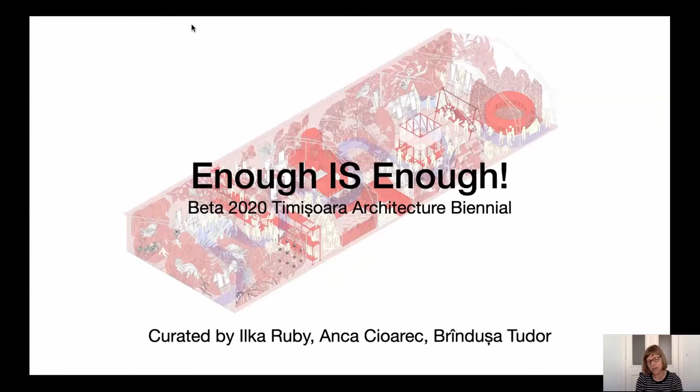And we structured the exhibition by 9 claims we made that we think are crucial for responsible architecture. And in this lecture, I will show one example per claim. So let's start with the first. Do we really have to build? Roughly 1 million animal and plant species are approaching extinction. This is more than ever before in human history. And the #1 driver of change is shifts in land use and sea use.

Urban areas have more than doubled since 1992, and 25 million kilometers of new paved roads are likely to be built by 2050. That means the work of planners, architects, and engineers will have a massive impact on that development and its effect on our planet. So every project should start with the question, do we really have to build? And no should always be considered an acceptable answer. And the project I want to show is by Lacaton & Vassal, a place in Bordeaux. The architects were asked to make a proposal for a competition to embellish this plaza, just to make it nicer.

And they participated in this competition, and they went there and spoke to people, spent some time there. And their conclusion was the place is already beautiful. It doesn't need anything more. Then nothing has to be built there. The only thing that could be changed is a bit of maintenance.

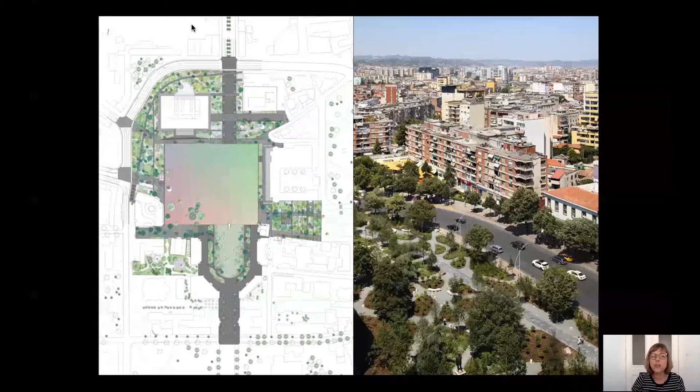So when you see here in the plan, there is a green belt that surrounds the plaza, and this green belt creates some kind of filter between this dense and chaotic city and this really huge open plaza in the middle, which is here marked as this square. And this green belt consists of a huge variety of plants that are from Albania or used to be from Albania, but many of them don't exist in Albania anymore and had to be re-imported.

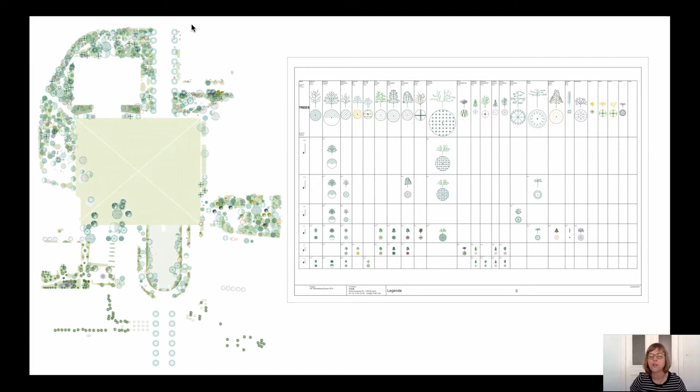And then they worked together with local communities and adjacent users of the buildings to create a kind of programming of these different gardens they created, so that the functions of the buildings can also spill out into this green belt, into the plaza. So you have a lot of different atmospheres in these gardens surrounding this big plaza.

And what it also did was, of course, that these plants and gardens combined these buildings that were scattered around the plaza, most of them from the communist era, very monumental buildings. You see also these water puddles on the plaza. So there's an underground system of fountains.

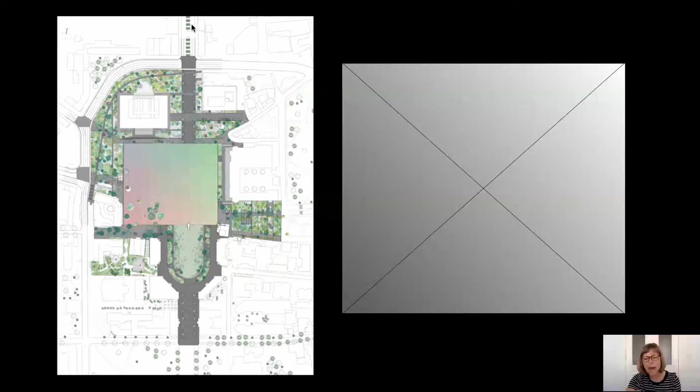And once you're on this tip of the pyramid, you're more or less on eye level with these huge buildings surrounding the plaza. All these buildings were built on monumental pedestals. So when you're standing in front of them, you look very small, and they look very monumental. And by providing this very shallow pyramid, you will be able to see these buildings on eye level.

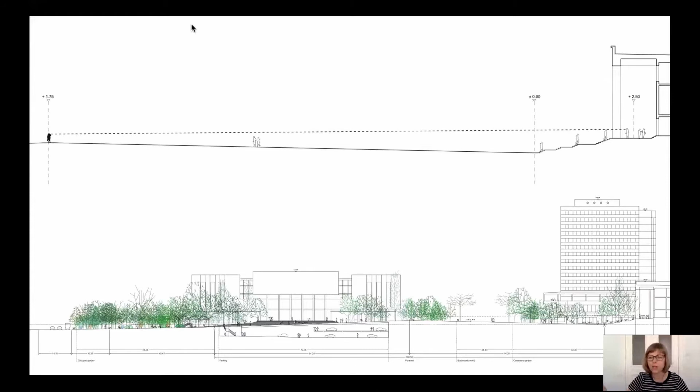And the lower section shows the whole plaza. You see, there's also an underground parking included. These are these underground fountains, and these fountains make these very nice patterns on the plaza. You see the colors of these stones, but it also, of course, creates some kind of microclimate. It's a very hot place, so it cools the place, and of course, it's also fun for kids to play with the water.

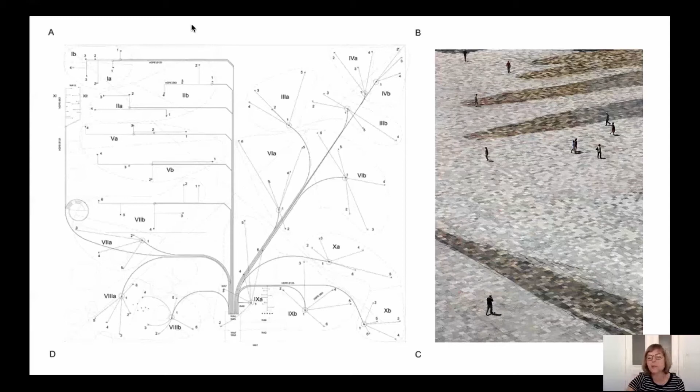When you look at the ground and the stones, this is also very interesting, because these are different stones from all over Albania, and they were used here on that plaza.

So the architect made a process where they were looking at what kind of local stones are available in the country, what are the properties, what are the colors, and so they brought together all those stones with these very different structures and colors, and they created this pattern, these shading patterns.

So when you see to the right the pyramid, you see that from the left bottom corner it's more the reddish colors, and opposite, the right upper corner, it's more the greenish colors. So you have this very, very subtle shading in the end. Yeah, and this makes this really amazing plaza. Of course, there's much more to tell about this project, but I will only focus on the aspects related to the claims we made.

Reusing what is abandoned is the next claim we made. The decline of industry has resulted in a vast abandoned built heritage. And although these buildings were constructed for very different purposes, they are often surprisingly flexible and can be adapted to contemporary needs. Protecting these structures and inventing new ways of inhabiting them is an important part of architecture today. And demolishing these buildings should be our last option.

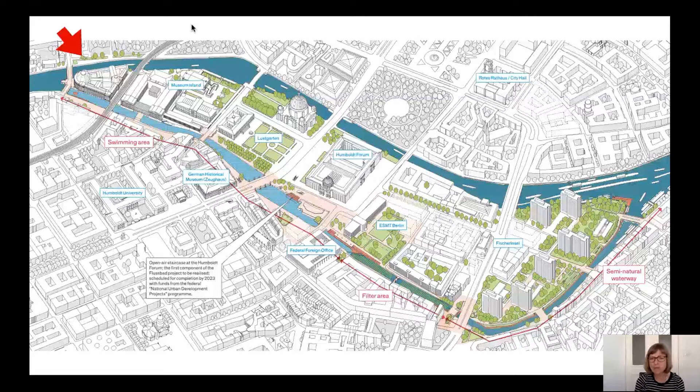Which is totally public, without any entrance fee, without any lifeguard, and it gives access to the river before it combines again with the other arm of the river, close to where the arrow is. So I will lead you through all these 3 parts. This would be the semi-natural part. Before, this was just a kind of stone canal. I mean, it still is a stone canal because the project is not yet implemented.

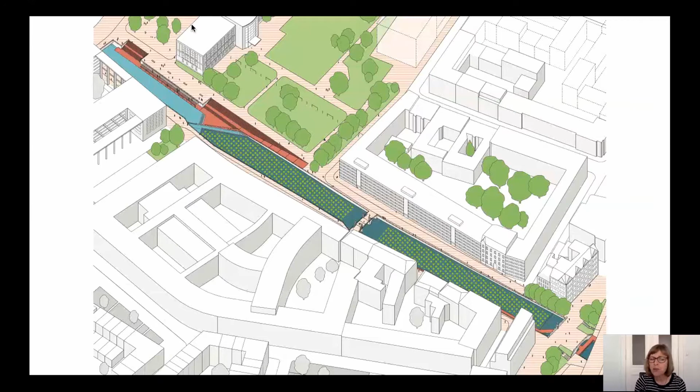But this first part would be kind of a natural environment where you have the possibility to go down to the water, and you have this kind of adjacent park to it, and this walkway. This is the section for it. And then if you go further, you come to this kind of filter area. This would look like this. So it's really reed and sand and gravel, and the water, by flowing through this, gets clean.

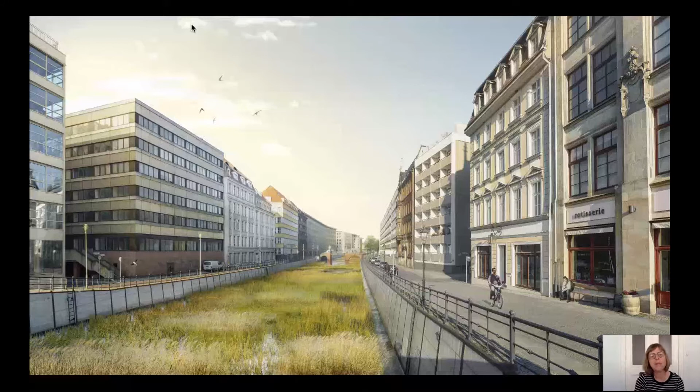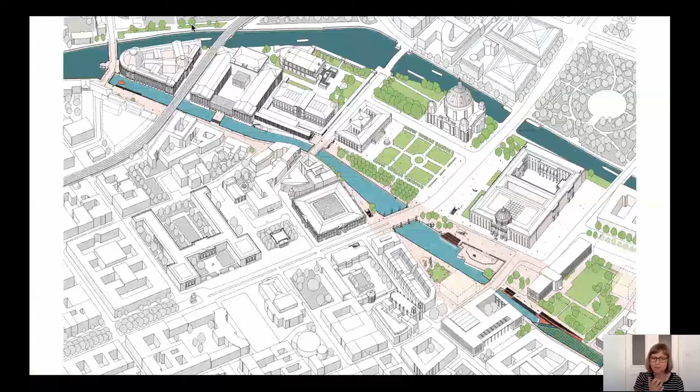And it flows into this bathing area, the pool, and there are just minor adjustments with stairs that make it possible to go down to the water, with some kind of changing rooms where you can change and store your stuff. That would be the last part of the swimming pool. That looks like this. So you could experience this kind of new historic city center from the water.

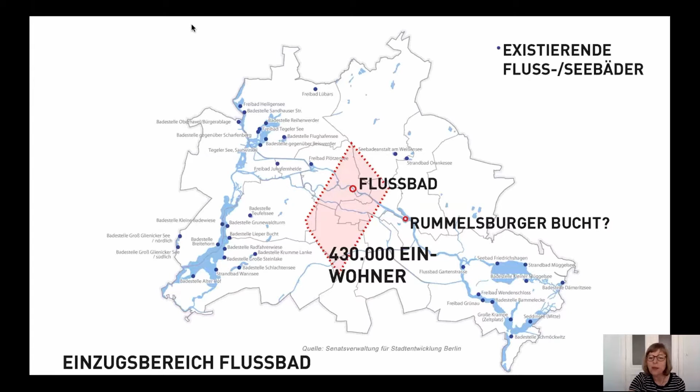Next claim is repairing what is broken. The most sustainable building is the one that never gets demolished, since its materials never turn into waste and no additional emissions will be produced in erecting a replacement. So we must invest time and resources in repairs so that every structure can reach its maximum lifespan and new ones don't need to be built. Maintenance is a craft in itself and must be considered an integral part of the design process, which can generate important features of the architecture.

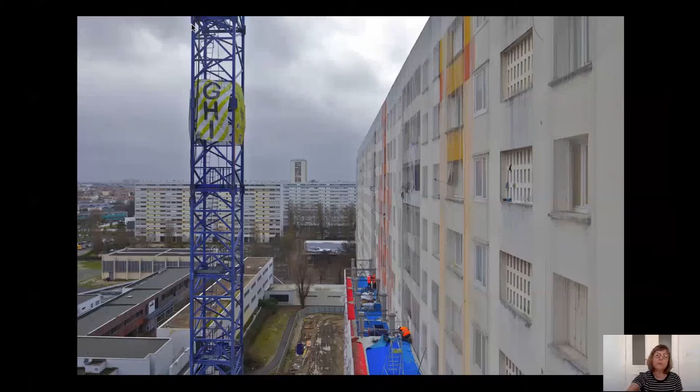So what was done? It was transformed by taking away parts of the existing facade and replacing it with a winter garden and balcony. You see here on the lower part, there are already these platforms for the winter gardens. This was built first, and it would also already work as the scaffolding for transforming the building. Once this was built, the facade was taken away, and after the transformation, it would look like this. So you have a huge winter garden.

The existing facade is replaced by these large floor-to-ceiling glass sliding doors, and you have this winter garden, and on the left you see the sliding doors of the winter garden, which are of this thin corrugated polycarbonate material, and the balcony in front of it.

And by adding these silverish curtains you see in the back, you can also protect from too much sun, and there are also curtains inside the existing building, behind the glass facade to the right, which help to insulate the building. These are thick thermal curtains.

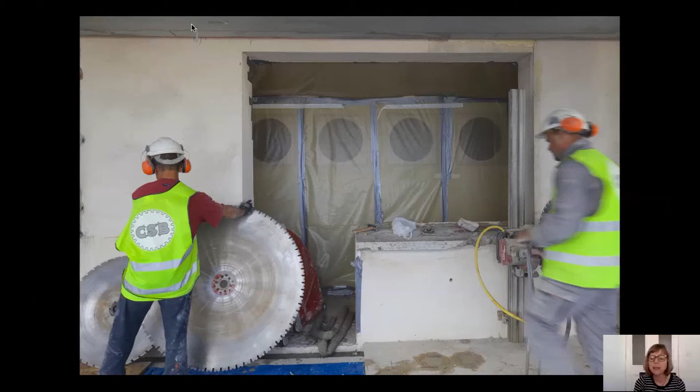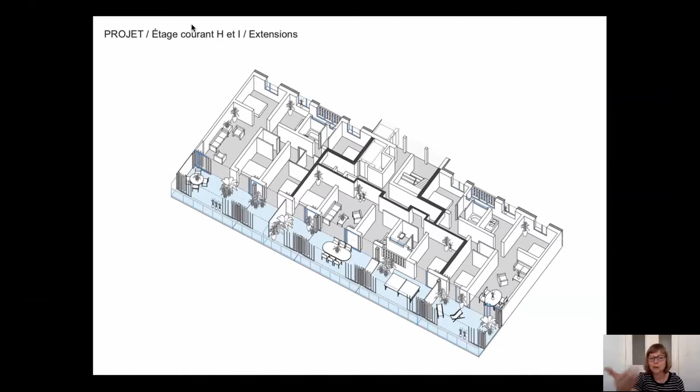So something that looked like this before got kind of cut out. You see this temporary wall behind the opening to prevent dust going into the apartment, because as I said before, the apartment is still occupied. And then after the transformation, you have a space like this. Here you see the ground plan, and all the blue part is the newly added part of the winter garden

and the balcony. So this winter garden is not only an extra space the inhabitants can use, and by this enlarge their apartment. It also works as a thermal buffer, because this is not heated. It's a not heated space, but of course it gains passive solar gains, and by this it's a buffer, and it reduces the heating costs for the apartments.

Recovering materials would be the next claim. Usually you shouldn't demolish buildings, as we saw before with Lacaton & Vassal, but when it comes time to demolish a building, nevertheless, we must learn to use its leftovers. Building elements can be stored, protected, repaired, and finally put back on the market. By reusing materials and components we already have, we can save resources and reduce waste.

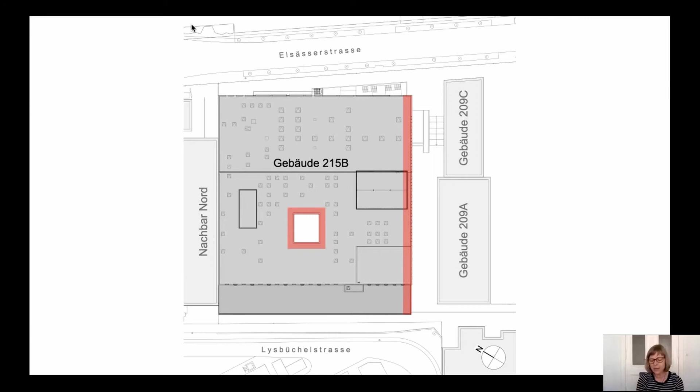So when we see the ground plan, it was a very deep building because the distribution center didn't need light. But now, of course, it needs light. And so they had to cut this courtyard into the building. And also on the right, they had to shorten the building because the building regulations asked for this kind of passageway on the right. So this is the passageway that had to be there. And you see, by doing these two interventions, the courtyard and the passageway, there was a new facade necessary.

86 meters long and 10 meters high. And these two facades, to the new courtyard and to the passageway, of course needed windows. So the architects collected 200 windows, and they did this by asking window producers in a radius of about 100 kilometers if they had surplus production. That means windows that were produced too much, or not according to the order. And usually these windows are thrown away, but by this they could be saved and used for this building.

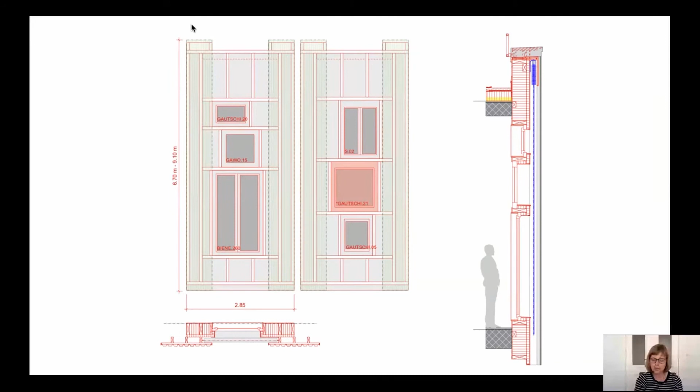Of course, these were the forms and sizes of these elements. So you had various window shapes and sizes, and they all had to be combined in a design that could take in these very different shapes and sizes. So these are wooden facade elements where these different windows can be integrated, and to make this very wild window arrangement a little bit calmer, you have these green metal sheets to the left and the right. These metal sheets, I'll come to later.

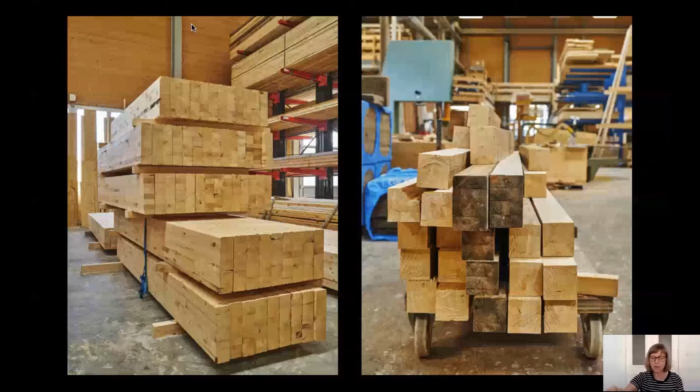First, you saw these frames are made out of wood, and this wood is also recycled. The facade elements are constructed from 150 cubic meters of reused wood. The architects collected roof purlins that are usually burned after demolition of a building. And this wood was upgraded to glue laminated beams that meet the strict technical requirements for facades. So that was an upgrade of this kind of used material.

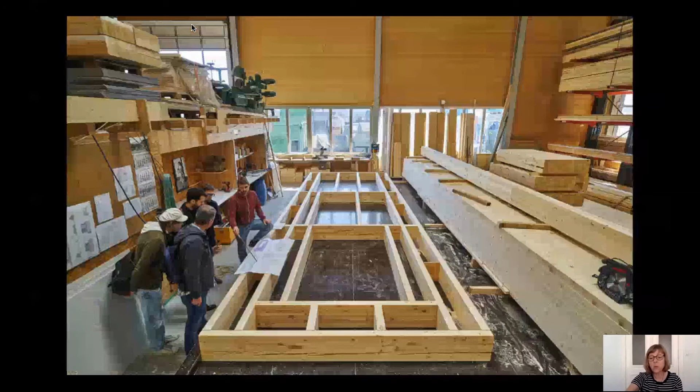And out of these beams, they built these elements, facade elements. And these elements were then filled with the windows, but also with insulation material. And these insulation materials are also leftover pieces of rock wool insulation that were collected from other construction sites.

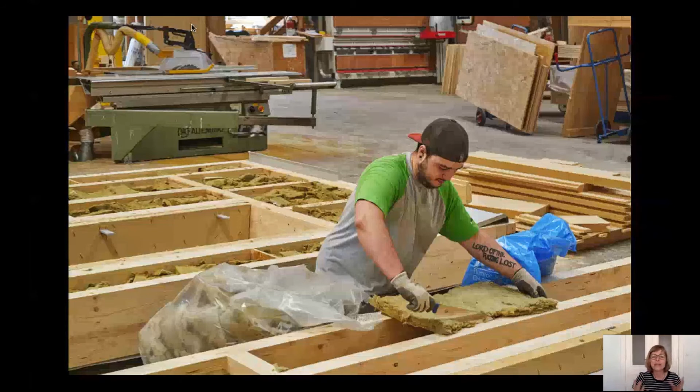So usually these kinds of leftovers are melted down again with a lot of energy and processed into a new product. But here these pieces were collected and inserted in this wooden frame, and whatever was necessary to fill up was filled up with stone wool granulate. So this was all prefabricated in the workshop, as you can see here, and then brought to the construction site and assembled as the new facade.

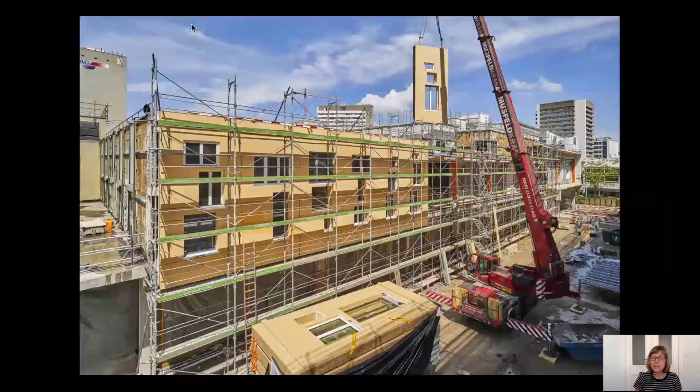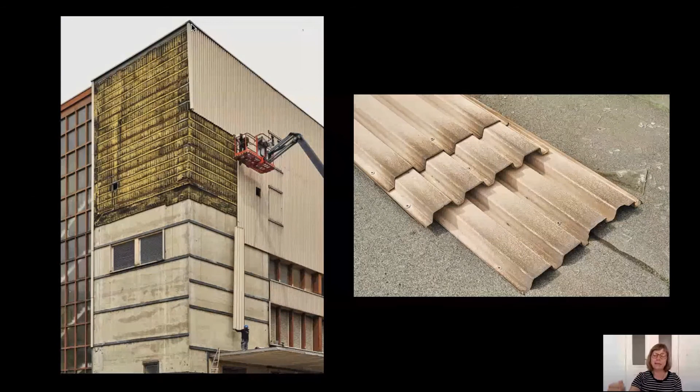Now we come to this green metal cladding that was used in the existing building before, and it was reused directly. And in addition to this, there was also sheet metal cladding from another building only 50 meters away that wasn't used anymore. So they dismantled also this material and reused it in this building here.

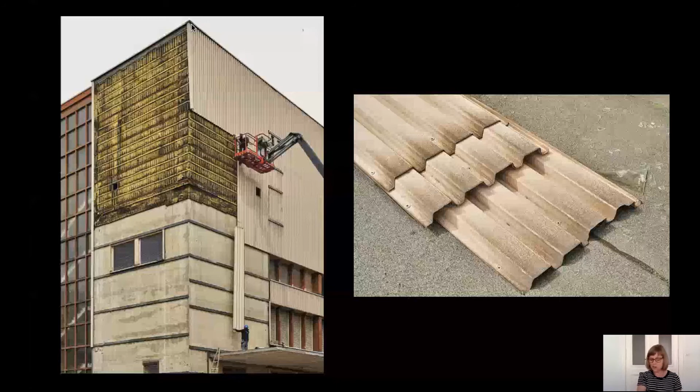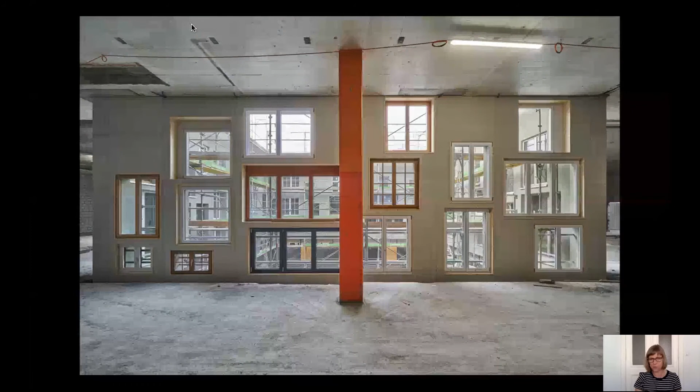To change from a linear to a circular economy, the availability of used building materials and components needs to be improved. Used materials should be as easy to acquire as new materials. This is of course not yet the case, but there are more and more people that deal with it, and I think this is something that really should be supported.

Remembering crafts was our sixth claim. To reduce waste and emissions, we must rethink not only what we build, but also how we build. And in an increasingly digitized world, we must value the social importance of labor and manual fabrication. Looking beyond the boundaries of building as usual can reveal alternative construction techniques, materials, and typologies.

And sometimes a look back into the rich history of techniques that have either been forgotten or deliberately suppressed in the name of progress can offer smart solutions. By rediscovering, learning from, and adapting methods that evolved over centuries, we can make smart use of local resources, both materials and human know-how. This project by Anna Heringer, the Anandaloy building, is a very good example of that.

It's in Bangladesh, and it's a center for the treatment of people with disabilities and a workshop. And often people with disabilities are seen as a kind of punishment from God or bad karma for their life. And because of this, they are rather hidden than included. And places for therapy are very rare in the country and often not existing at all in rural areas such as this here. And in the beginning, the building was only planned as a therapy center.

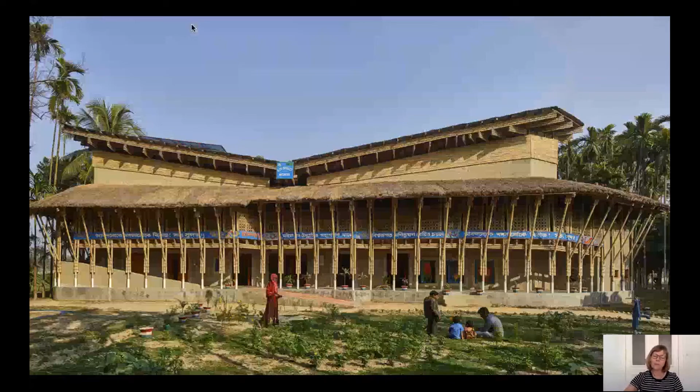But then Anna Heringer and her team were able to expand the program of the building and include another story, hosting a workshop for the female tailors in the village. And the concept was not only to provide treatment for the people with disabilities, but also provide them with an opportunity to learn and work and engage in the community. So you see, the building has this huge ramp so that also people with disabilities are able to enter the first floor.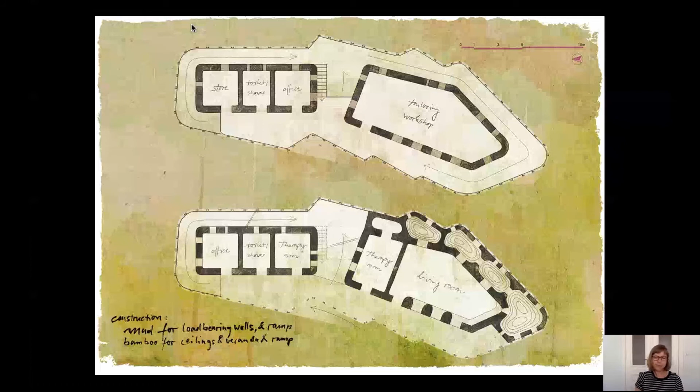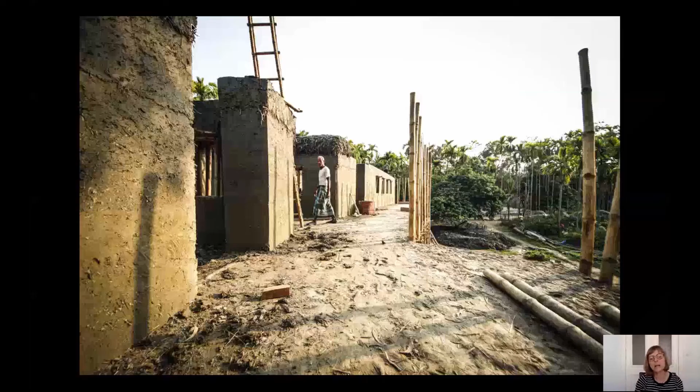It was developed together with a local team and built with the local team. And you see here, it was built out of local materials, adobe and mud and bamboo. And both materials leave no waste if the building at some point gets demolished. So the bamboo can degrade, and the mud just disappears, of course. You see here how the building is being built. So the walls are out of mud, and the roofs are made from bamboo.

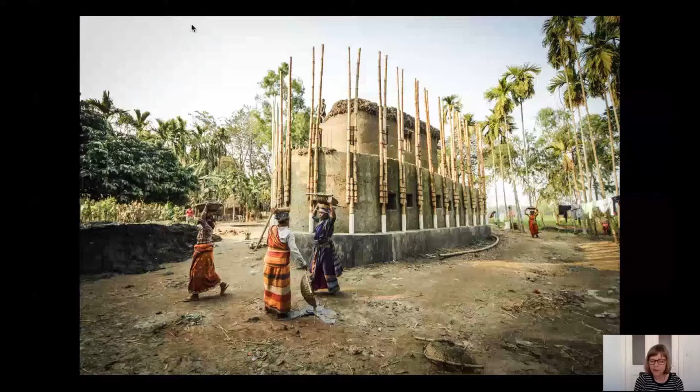You see the therapy and learning spaces on the ground floor. The therapy spaces here. You might have seen on the ground floor these cave-like spaces where kids can hang out and hide and play.

And you see the first floor with the access to the workshop where the women can work with the textiles, producing first of all clothing, but also very beautiful things like this stitched ground plan for an exhibition, for example.

So we have seen mud and bamboo before, two very old building materials, but we also must research new alternatives that follow a cradle-to-cradle design approach and products that are biodegradable or loop back into the cycles of production. Construction components can become packaging or agricultural nutrients, and industrial or agricultural byproducts can become building materials. And already known renewable materials such as wood, bamboo, and hemp can be exploited even further.

To achieve this, architects must collaborate with biologists, ecologists, and chemists to cultivate new biomaterials made from fungi or bacteria. And I'll show you two examples of that from Dirk Hebel and the KIT Karlsruhe. So one deals with bamboo. We have seen bamboo before with Anna Heringer, and there the bamboo was used as it is, the trunks of the bamboo. But this can also be developed further.

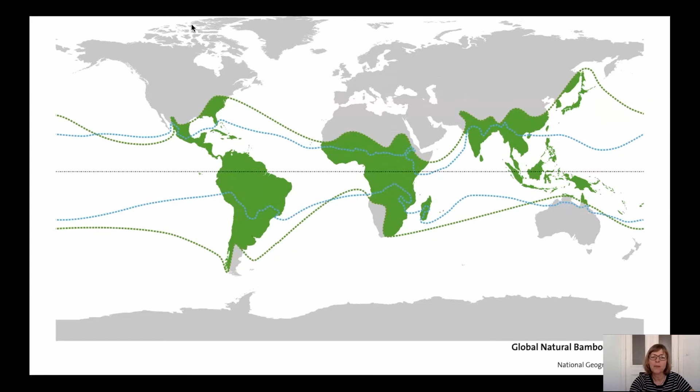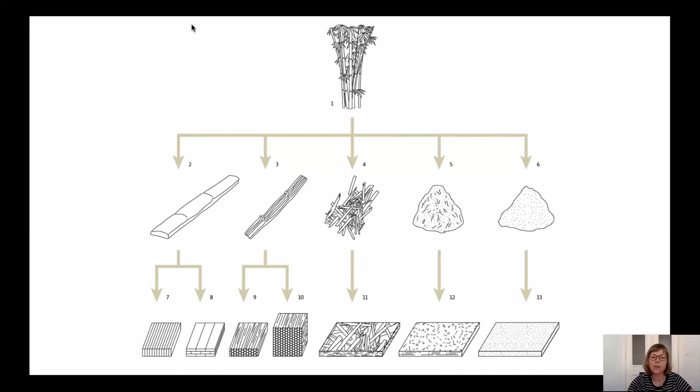So instead of using, let's say, the trunks of the bamboo, you can, of course, develop it further. You can cut it and make panels and other elements out of it, so that you can use it in other ways than we've seen before. And a lot of new applications are possible. These are two of the products that are developed. Bamboo is also really a strong material. We see here when you compare it to steel, it's even stronger than steel.

And if you think that steel reinforced concrete is the most common building material in the world, and that developing countries use close to 90% of the cement and 80% of the steel consumed by the global construction sector, but very few of these countries have the ability or resources to produce their own steel, bamboo could be a very interesting replacement for them, because then they could produce this by themselves and they are not dependent on the developed world.

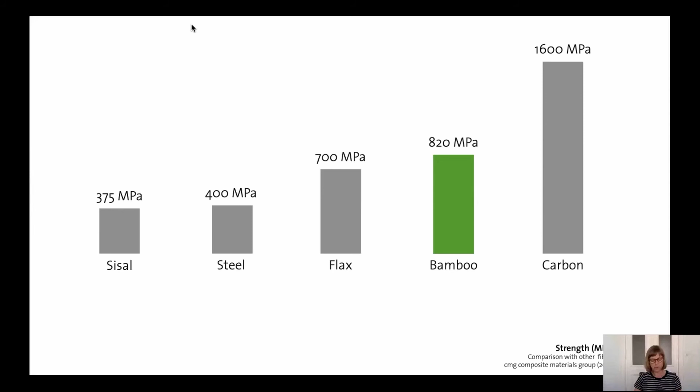So, for example, out of 54 African nations, only 2 are producing steel. So all the others have to compete for steel on the global marketplace. And this is why there is research going on into how, for example, bamboo could replace the reinforcement of concrete. And so this was the bamboo example.

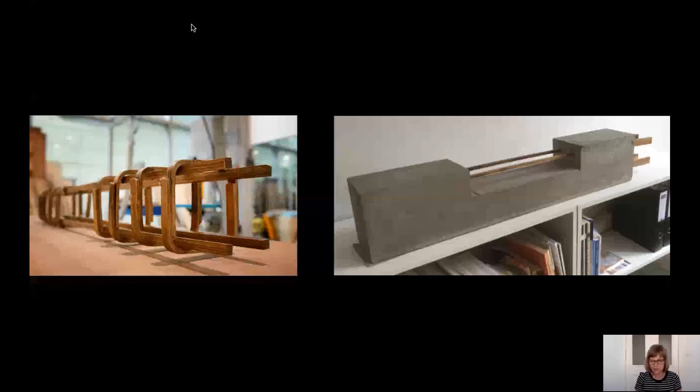And another example is mycelium. What is mycelium? Simplified, one can say it's the roots of the mushrooms. It's a kind of extensive underground root network and normally remains invisible. And it grows very extensively, densely and homogeneously, and it represents the digestive system of the organism. And this can be used to grow building elements.

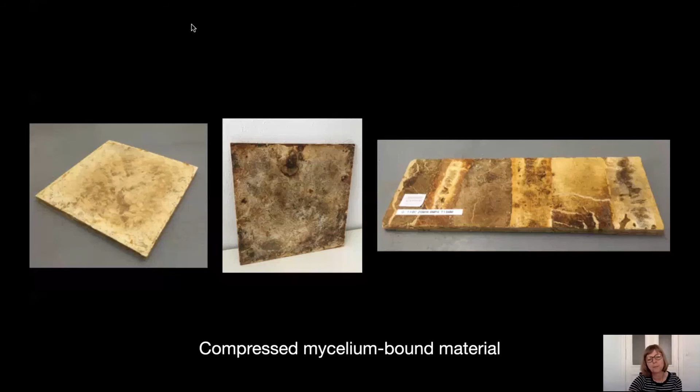In mycelium-bound building materials, the binding power that this root network provides us is used. Agricultural waste or waste from the wood and food industry can serve as food for the fungus for the growth process. And the mycelium network binds the organic substrate as it grows. This process can take place in specially made molds, so any geometry can be produced. And we see here some examples of compressed mycelium-bound materials. We have these panels or insulation material, as we see here in this wall.

And this material combines several properties. They have thermal and acoustic insulation, and mechanical strength comparable to that of polystyrene foams, up to plywood. And of course, it also uses low energy during production, and it's biodegradable. And here we see the MycoTree that was developed at the KIT. Here it's used as a structural element. The mycelium was grown in these different elements, and these elements are then connected, as we see here, into this kind of structure.

Caring for community would be the next claim. Because a responsible architecture takes into account not only the ecology, but also the economic and the social aspects of a project. And over the past decade, we have witnessed a growing social movement fostering collectivity, sharing, and participation. In the wake of the global real estate and financial crisis, a new generation started seeking alternative ways of life based on sharing, and the idea that you have to own something in order to use it became obsolete. So why buy a car if you can share one? Or why pay for a hotel if you can swap flats?

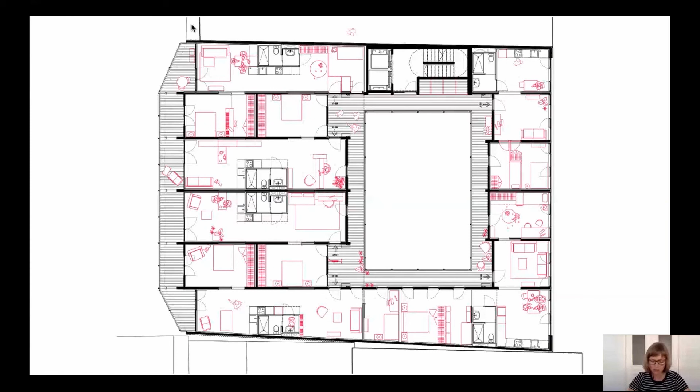So this is one of the standard ground plans of the building. It consists of 28 private apartments; they have 40, 60 or 75 square meters. But the project also consists of a lot of collective spaces. We see here the ground plan. To the left, there's a huge collective kitchen space and dining room. There are laundry rooms, a multi-purpose space, spaces for guests, healthcare spaces, storage spaces, and exterior and semi-exterior spaces such as the patio and the roof terrace.

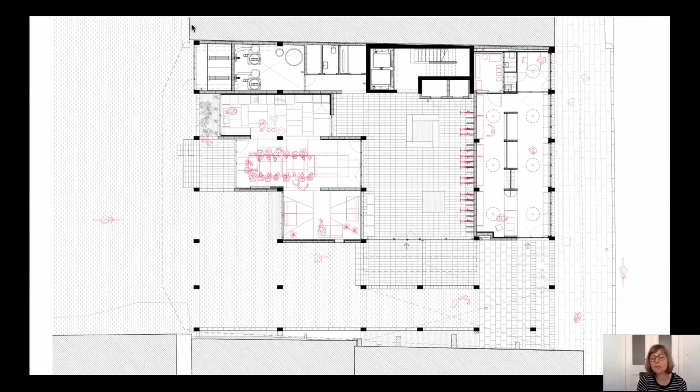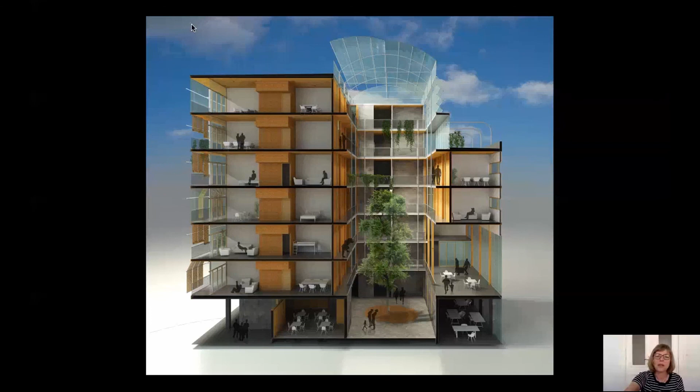So this is the collective kitchen. And we see the section of the building with the kind of patio. And there's this big double height space to the right on the first floor. This is also collective space. And we see also the roof terrace to the right. This is the collective space with the laundry, which is used for many purposes.

All the apartments have access from this kind of arcade surrounding the courtyard, which is also used as a balcony and makes a kind of transition space between the public and the private. You see here already a little bit of the covered roof, and this is the terrace. The roof can be opened and closed according to thermal needs. Here you see the winter and the summer, so the project also makes use of passive solar gains, so that the heating costs could be reduced too.

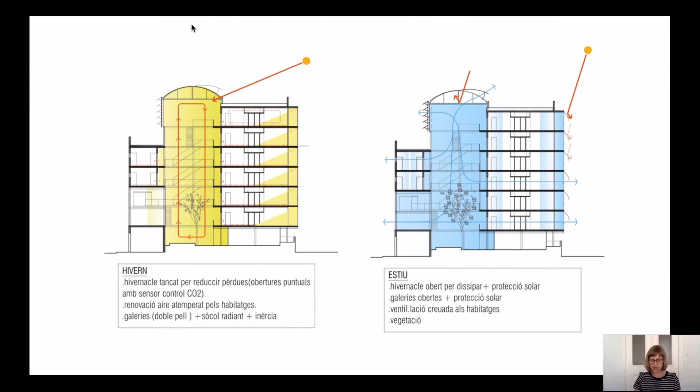Maintaining a livable planet for future generations will require dramatic changes in the way we build and live. But a shift to a more responsible lifestyle can only succeed if it gains wide acceptance. Therefore, raising awareness and education are key when it comes to establishing new ideas and habits. Scientific knowledge and experience from best practices have to be easily available online for people in the field, and architects must communicate their ideas to policymakers and the public at large.

This might be done via transdisciplinary networks of citizens and experts that bring together knowledge and lessons from a broad range of disciplines. And we should establish laboratories for collective and experimental learning, where people can get hands-on experience with new methods and materials that are developed. So as a last project, I will show you the Floating University in Berlin by Raumlabor.